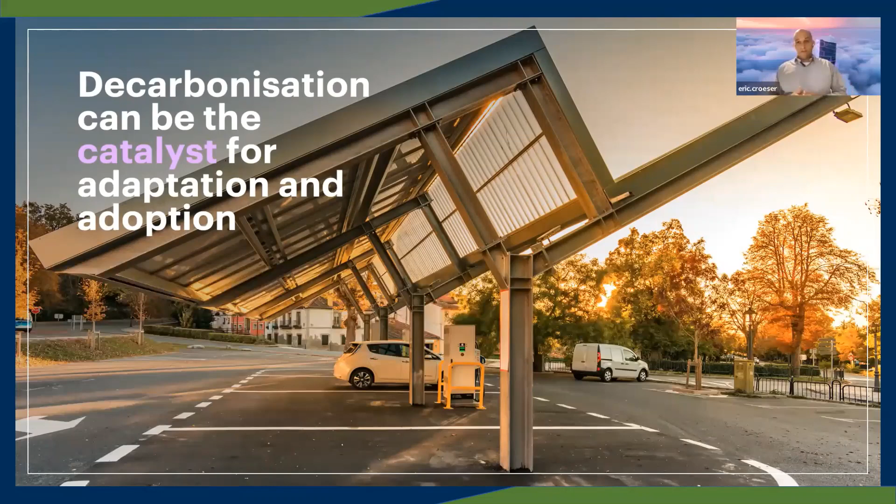So when we start referring to an integrated value chain, what we are actually referring to is seeing the picture for what it is. We have been very, very good, as I mentioned earlier, to see components of that and really optimizing components of that picture. But the same as any painting that you see - it's really if you start moving away from it and start understanding how the holistic nature of that picture looks, you actually understand where you're going to.

So when we talk integration of value chain and integration of data across the stack, it's really around seeing the holistic picture for what it is, understanding what our roles are that we play within that, and by stitching all of those little missing puzzle pieces together, we will and can see the main picture.

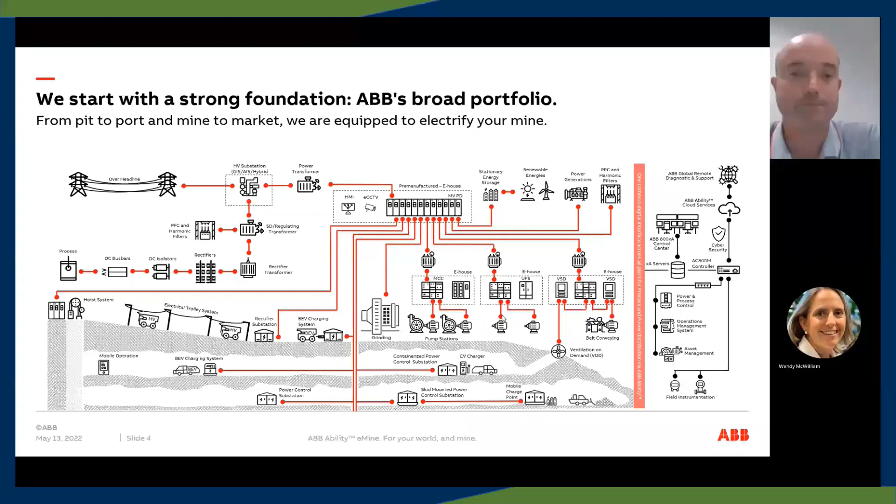If we actually break it down into an underground mine and be a bit more specific, you can see hoist on the far left and ventilation. These are some of the major users of electricity in a mine. And if we, as an example, are going to electric underground fleet away from diesel, what would be the impact on ventilation as a great example, right? That would probably reduce as an example. So that can be a major source of electricity usage.

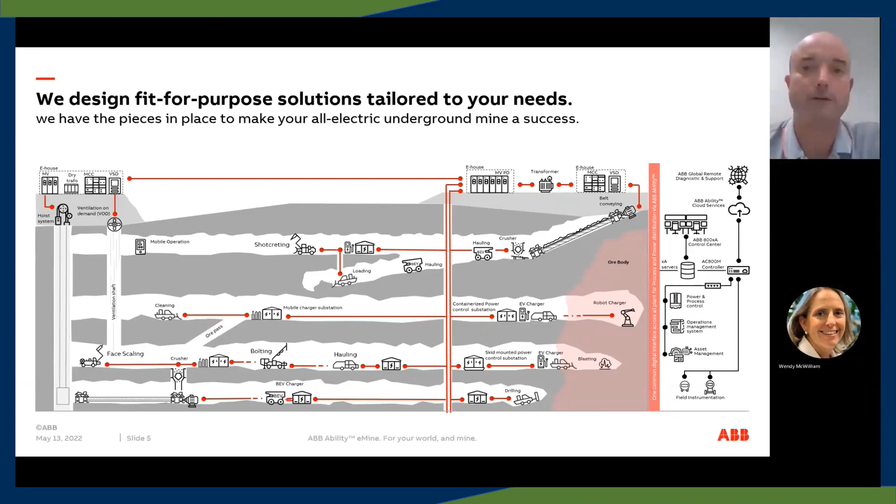We've got the underground chargers, for example, here you might have conveyors, etc. So how do we actually then couple this with making sure that we're not bringing 10 vehicles at one time to charge and making sure that they are spaced apart? Because 10 vehicles on an electrical network is going to be a lot different than one vehicle every 10 minutes coming to the electrical vehicle network.

If we look at it from an open pit mine, the key part here is really the trolley and the trucks. So the trucks generally on an open pit are generally larger, so we're talking much more draw on the power system. So we would look here at having a trolley, like I said, directly coupled to the wheel motors, and that would then provide a faster solution for it. There are the charging systems there. Do they have batteries in them and trolley charging battery?

Is it pure trolley then with diesel? There's a lot of different designs that are possible. Couple as well, again, with conveyor systems, shovels, drag lines. There could be skid mount power controls in the pit, as an example. There's a range of different electrical things that we can do.

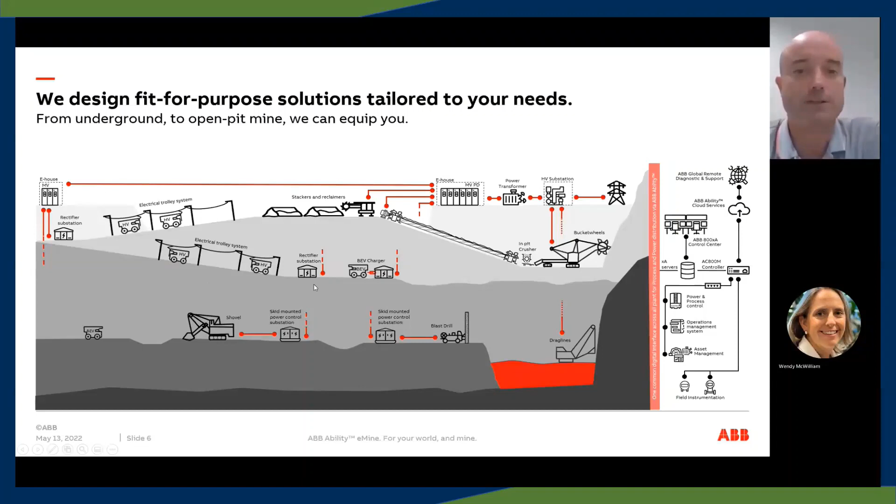Again, the same thing - how do you actually control all this and ensure that it's all not coming onto the system all at once? So 4 trucks coming on at 4 megawatts all at once onto a system can be quite a big load. When we look at the trolley system itself in a little bit more detail, the first thing is it reduces CO2. Yes, it's electric.

It's driven by the trolley lines above, and this is an example from Boliden. It's higher speed, and this is really one of the key advantages - going up those ramps, it's a lot faster, which means that in theory you can reduce the amount of trucks if it works out that way, and also maintenance cost.

It has a return on investment around 2 to 5 years, and it just depends on the makeup of what you're actually trucking, size and things like that. So it's a great system. We're starting to see more and more of these. This is in Boliden as an example.

One of the other key things that's possible is a 600 kilowatt fast charger. We use this for a lot of the underground applications and have some pilots in Canada currently. What you see here is the actual connector into the truck - it would raise and then engage with the truck and provide power to it. So it's a great solution we have for fast charging, generally used in underground type solutions.

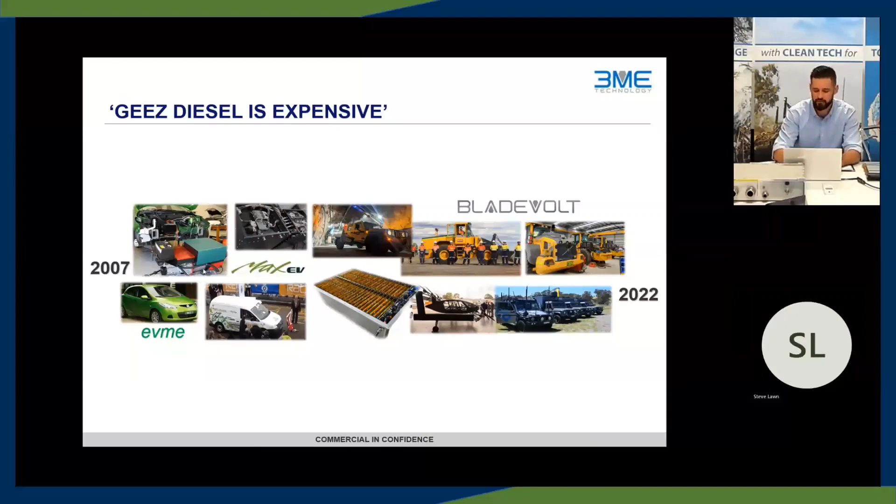So for a little bit of context, I'll flip now to the company video, which will provide some more information as to where we're at today.

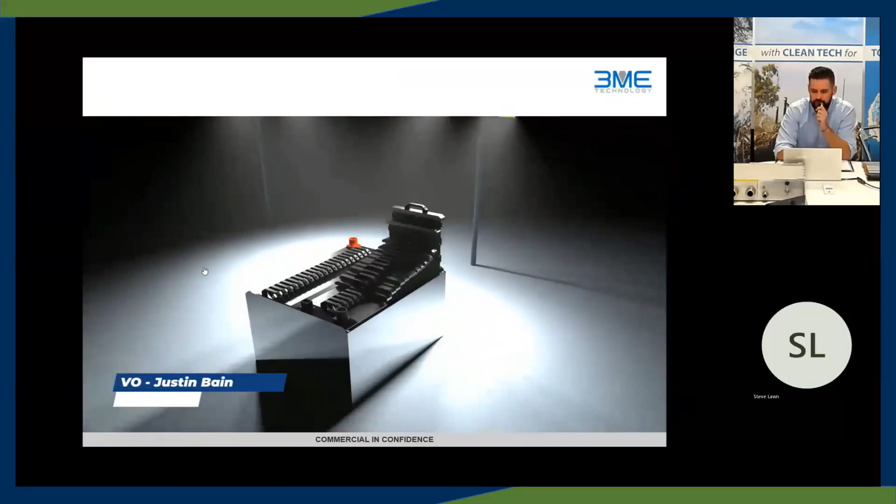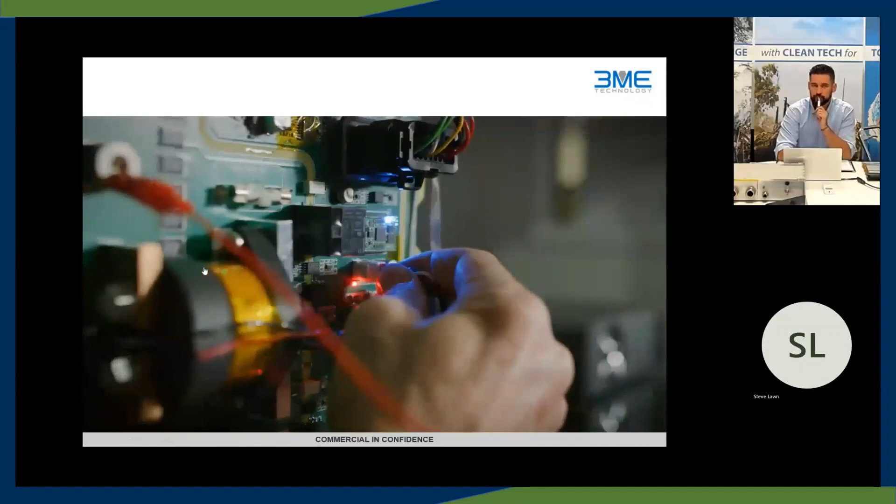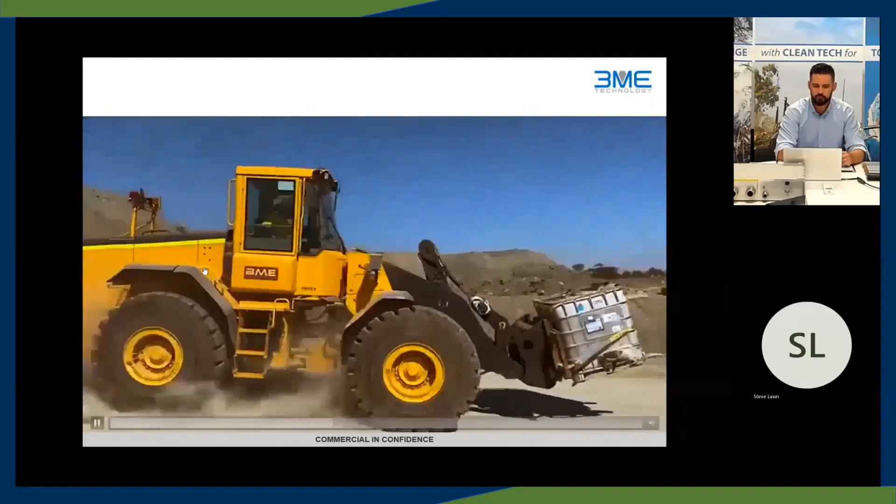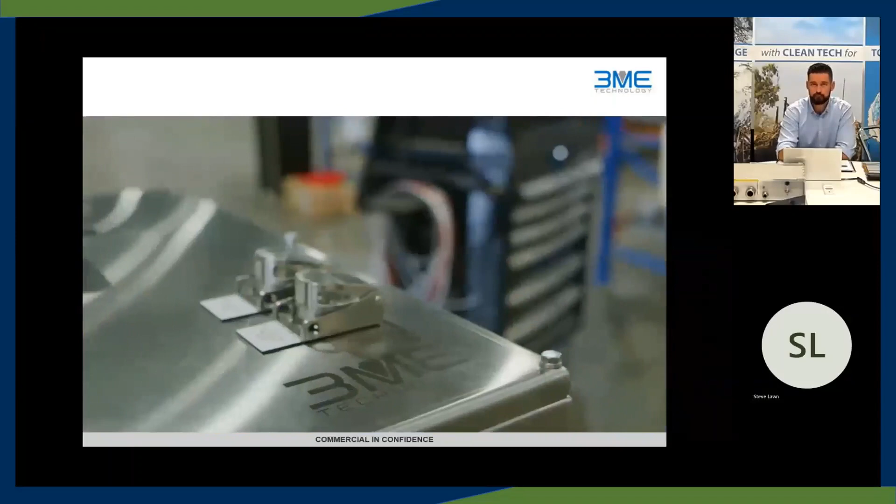3ME Technology is spearheading state-of-the-art battery systems into mining, military and marine applications to enhance performance, safety and sustainability. We are a fast-growing scale-up with three spheres of technology: power solutions, mobility and digitisation. We are an electric vehicle systems and battery technology company. We are helping large vehicle manufacturers electrify their offering through scalable products and services that include batteries, software, electric vehicle kits, and systems integration. We provide high reliability, clean tech for tough industries. Our team at 3ME Technology has deep technical and operational experience across the industries we serve. I'm proud of our amazing team for getting us to where we are now, but I feel like we're just getting started. At 3ME Technology, we are powering change in support of a cleaner future. So come join us and be part of the electric vehicle revolution.

Okay, the first problem that the team faced when they directed their attention towards the electrification of mining kit was, it's hard to take a battery from a passenger or on-road vehicle application and have that effectively perform in an underground mining environment. We all know how hard these pieces of kit get treated and the environments within which they operate. We also know that beyond anything else, they need to be safe.

So that's what's precipitated the last 5 years worth of R&D in the battery technology space, which has delivered the BladeVolt battery system. The BladeVolt battery system is a safe, modular, scalable, remotely monitored, highly maintainable system that allows us to predict, intervene and prevent battery faults that will lead to fires, but also identify issues from a maintainability perspective and remove the need to swap out a whole pack, rather allowing us to swap out a blade, which is a much more cost-effective effort.

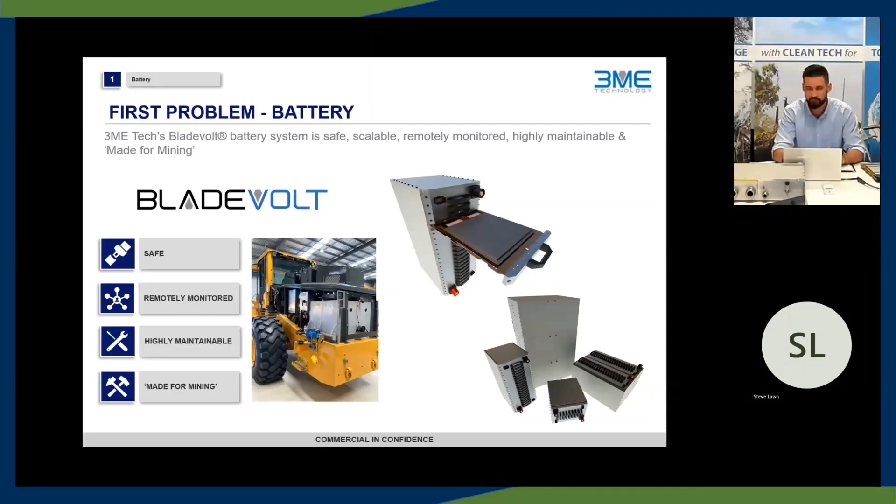So to solve that problem, we've sought to make a battery, successfully made a battery that's been designed from the ground up for mining. The second problem is, how do we get that battery into a system that works in an underground mine?

The first piece is duty cycle analysis. This is the cornerstone of any system design that we complete. It's constantly improving with data coming back from the field. However, it's what effectively needs to be done to decide battery size, which then feeds into power distribution and safety systems. So introducing 700 volts DC into a platform, into an underground mine, requires some safety measures, and that's a big thing that we focus on here at 3ME Tech.

The third is vehicle control unit software. So how do we conduct the systems integration in a manner that allows for minimal change management, i.e. an operator can jump straight in the platform, use its existing controls, and have the platform perform like its diesel counterpart.

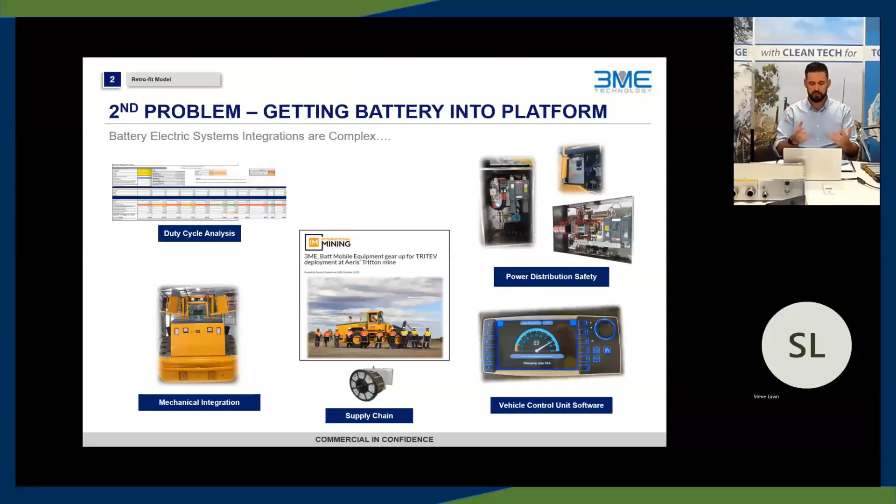You can see down the bottom there the motor, so supply chain, that's probably everyone's favourite problem at the moment. Don't need to speak too much about that, but it is a key part of the systems integration effort. And then finally, it's the mechanical integration of that battery electric engine package into a platform. We work with some really incredible OEMs that utilise their wealth of mechanical knowledge to fit a system that is battery electric into a platform that was designed to be a diesel.

That's a 1,000-volt AC inlet to 350 or 700-volt DC outlet, depending on your battery size. So that lives on the vehicle, which means that in stacks of up to 100 kilowatts, we can plug directly in from the 1,000-volt AC jumbo box, which will go through our power, through the charger, through the power distribution system into the battery and charge the battery. This allows for opportunistic charging, which we feel is the key to meeting some of these duty cycles.

Fourth problem, what do you do when the battery is at end of life in the vehicle? This battery, or the Bladevolt architecture, lends itself to quickly identifying which blades or which cells are suitable for redeployment into second life storage systems, energy storage systems, or peak load shaving type arrangements. So we expect between 5 to 8 years of useful life in the battery in the vehicle, and perhaps up to 15 years worth of useful life post vehicle in the low charge discharge environment that is static energy storage.

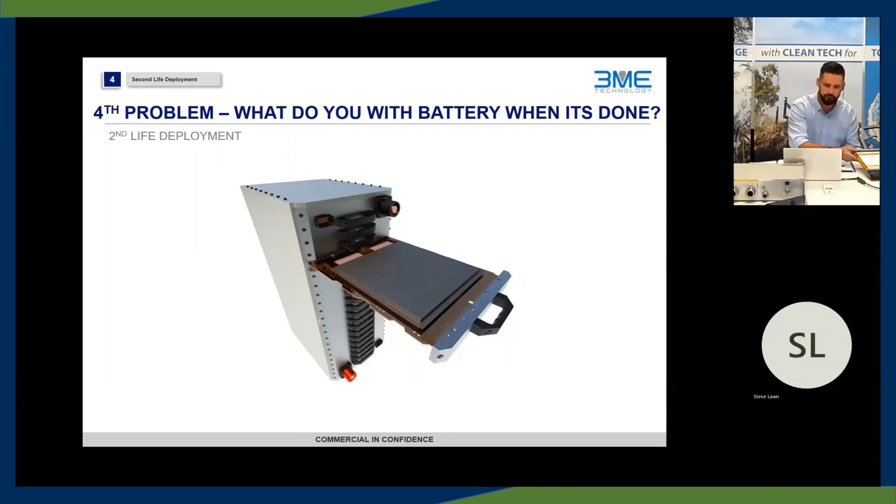Finally, the fifth problem, how do we learn and improve? The more data that comes in, the more we get to learn about our battery, how that performs and improve it. The more we get to learn about how the system or the battery performs in the system, how the system performs in the vehicle, and how that vehicle is utilised in the duty cycle in the mine.

So that's the 5 key problems that we're faced, and look forward to discussing these with you over the next little bit in the Q&A. Many thanks again for the opportunity to present.

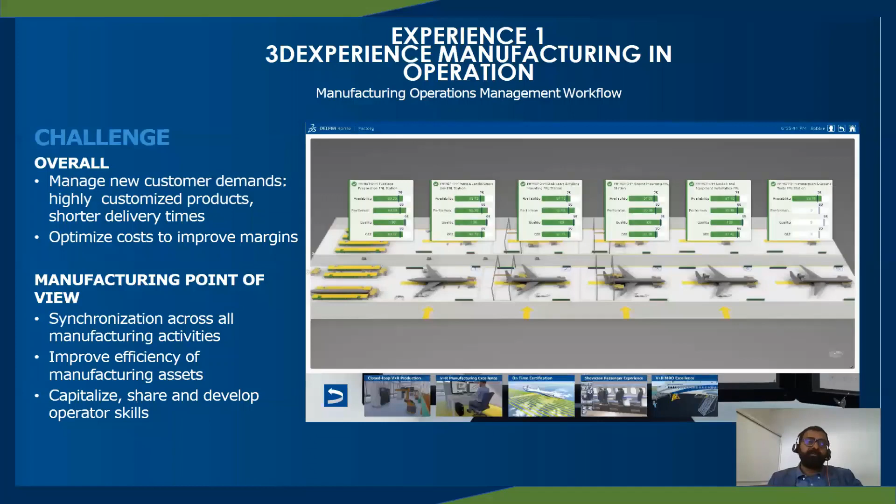Now I'd like to show 5 experiences which could be easily replicated from manufacturing industries to smart mining, and I'll be showing some real-life examples.

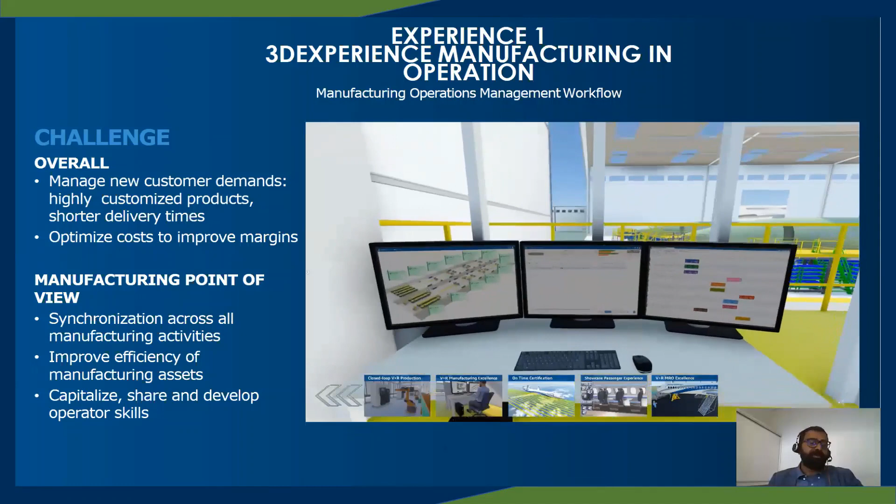What you're seeing here is a manufacturing operation management practice from aerospace and defense, which is largely being used for achieving greater productivity and sustainability. This is a manufacturing operation management solution providing digital technologies for processes, performance management, and visibility across all operations, magnifying the impact of operational improvements across the whole enterprise.

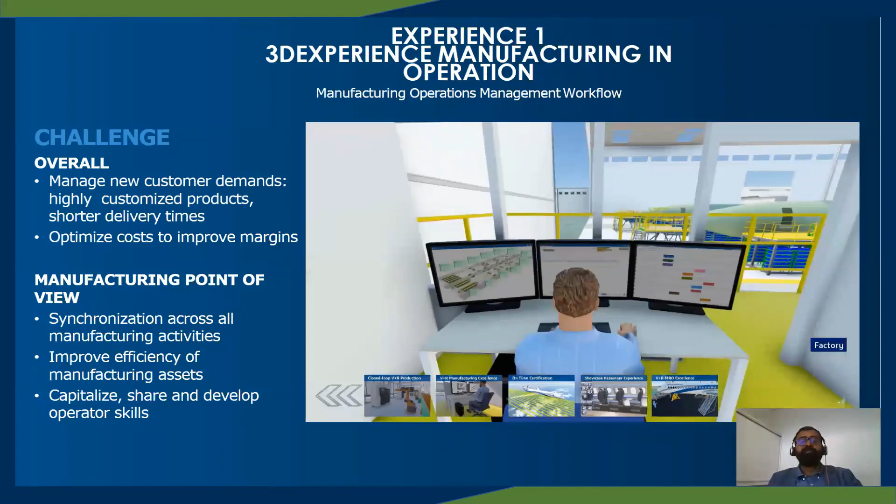This is a unified application which has business processes like production dispatch board or production management, quality management, warehouse management, production intelligence pack, and even integration for IoT sensors to achieve greater manufacturing flexibility.

As I said, we can leverage best practices from the aerospace and defense industries to bring value to mining companies as a unified application with a simple web and mobile-enabled interface, leveraging a single data repository.

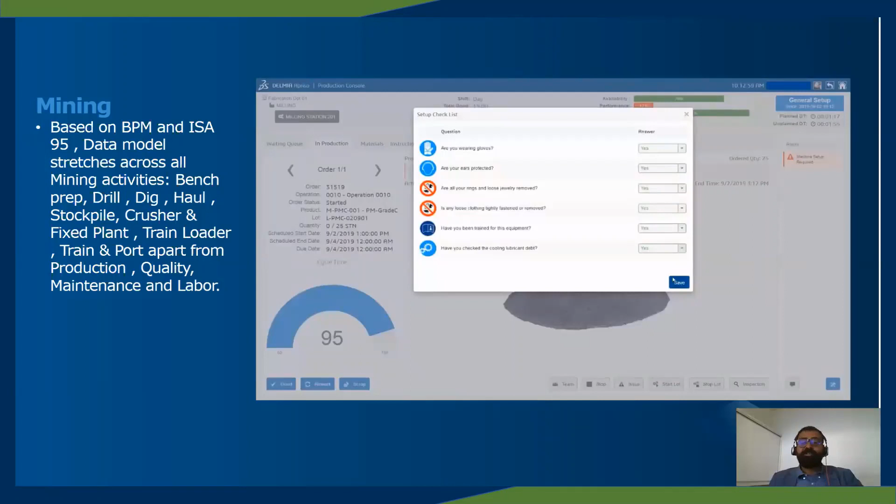This addresses all the requirements of mining companies for their digital transformation journey. The solution includes various business processes like production tracking, material balancing, stockpile management, and production execution management and decision support within the value chain. This is all based on ISA 95 architecture, which is an international standard for automation to achieve Mining 4.0 as a business process.

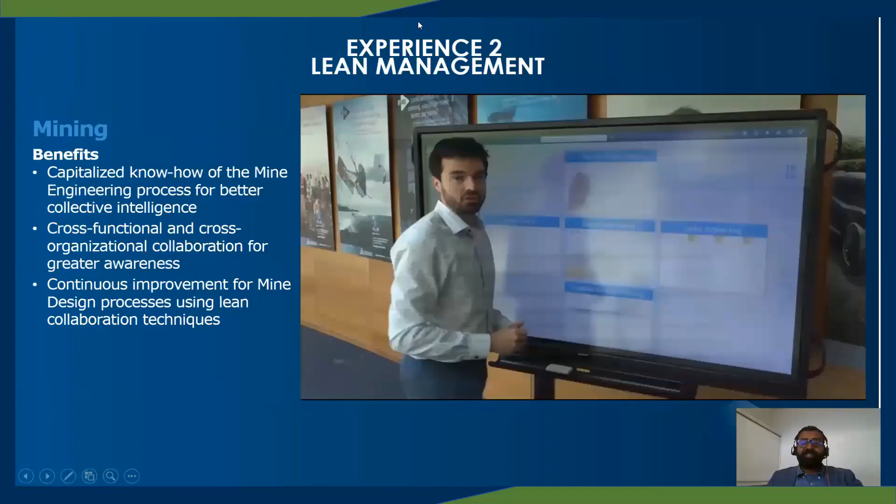Looking at our second experience, which is lean work management. A general tendency in mining is ad hoc working methods, which are not aligned with lean philosophy. In this case, we can establish a day in the life of a mine planner, mine manager, and even workers within this lean management application.

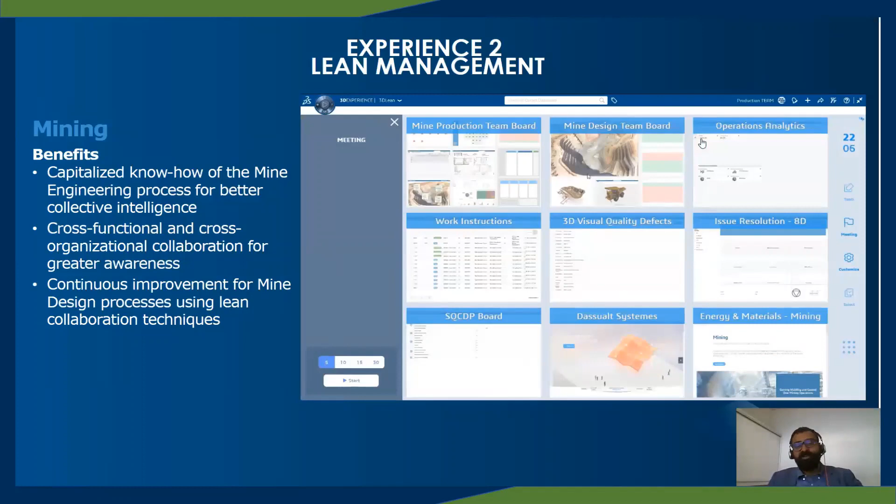As you see here, this is a modern interactive environment that closely emulates the simplest of meeting tools: a whiteboard, a marker, and a sticky note. The objective here is to replicate natural interactions and allow anyone to engage productively.

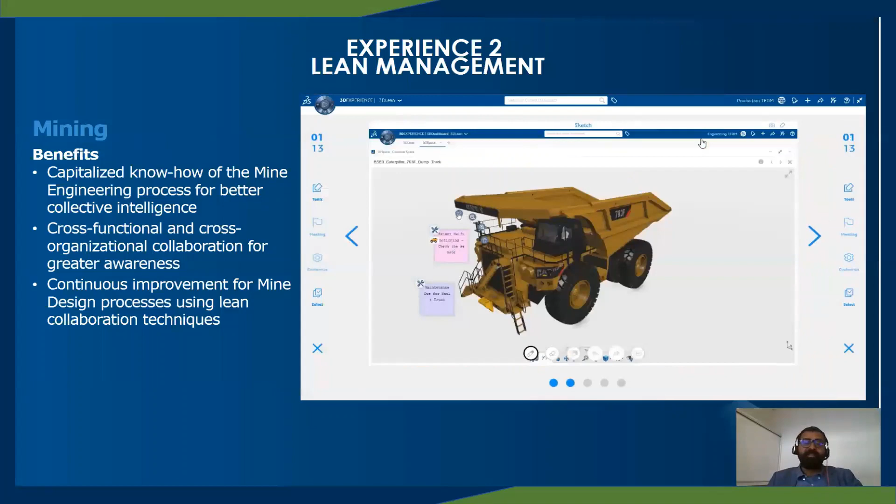You can also see how easy it is to include digital content like geology data and even operational data, bringing manual meetings onto the platform, making the best use of digital technology here.

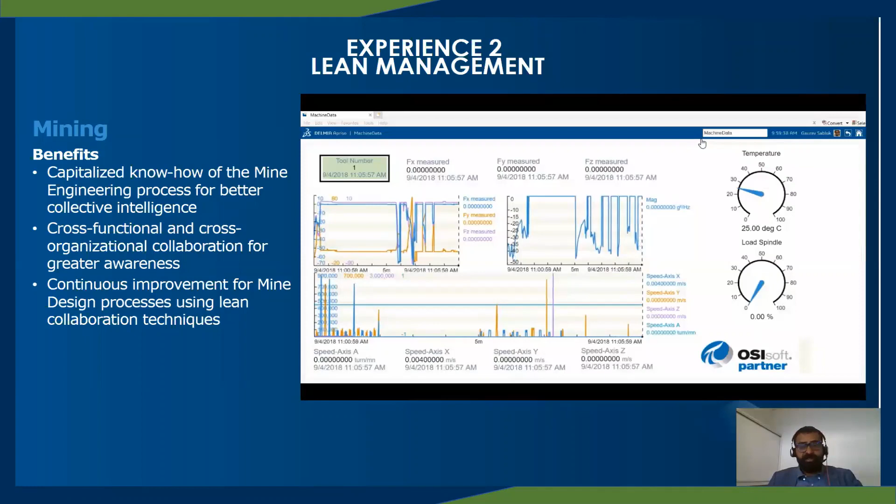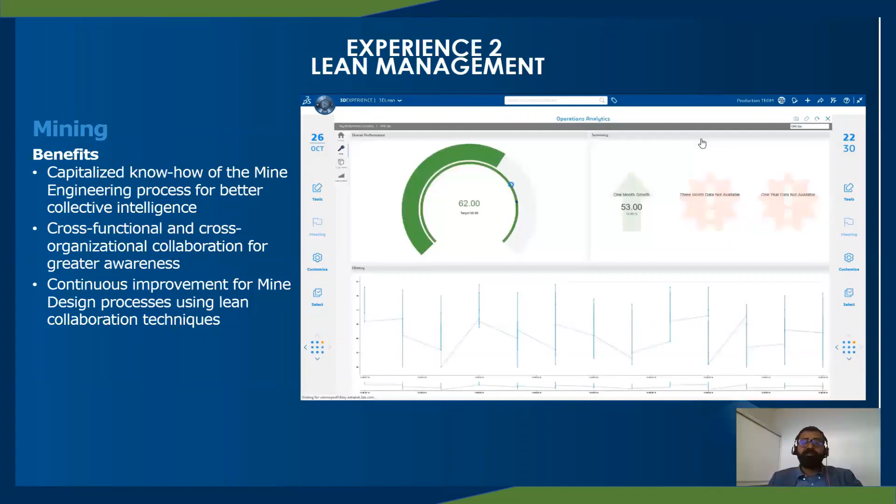Cross-functional teams can work together efficiently in lean mode to solve strategic issues like safety, production delays, and catch-up plans. In fact, lean principles can be applied to all mining processes to achieve sustainability, allowing the team to engage more efficiently. This is one of the lean tools we've been working with multiple mining companies to achieve resource optimization.

Looking at experience 3, how robotics and automation can be leveraged into mining practices. Robotics and automation has been in manufacturing for a few decades now, with continuous improvements happening in robotics applications in manufacturing. Replicating the same, especially for underground mining, can improve safety and operational efficiency through simulation and execution management, including development of programs, virtual programs, and validating PLCs, which is a greater value for mining applications replicating best practices here.

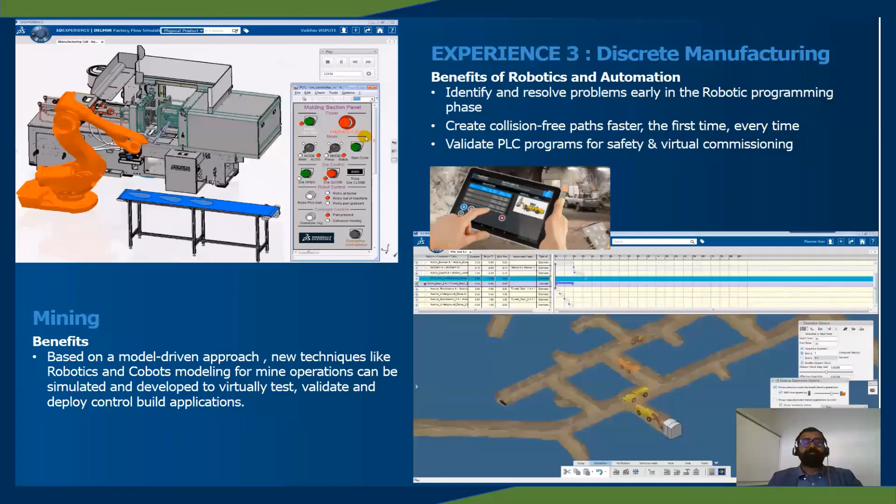With regards to manufacturing practices, that is manufacturing simulation to achieve some of the mining simulation practices here: discrete event simulation has been used in manufacturing for throughput analysis and resource optimization as well, by identifying bottleneck areas and congestion areas in the production plant, and to optimize resource utilization and material flow.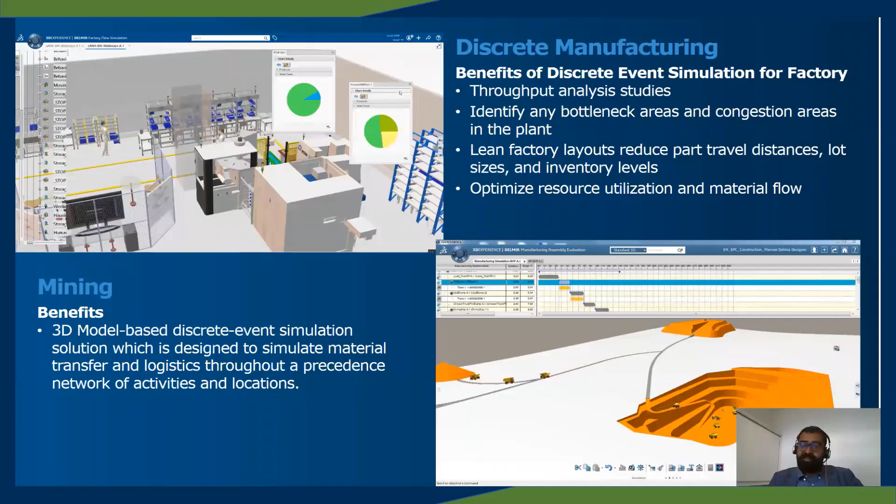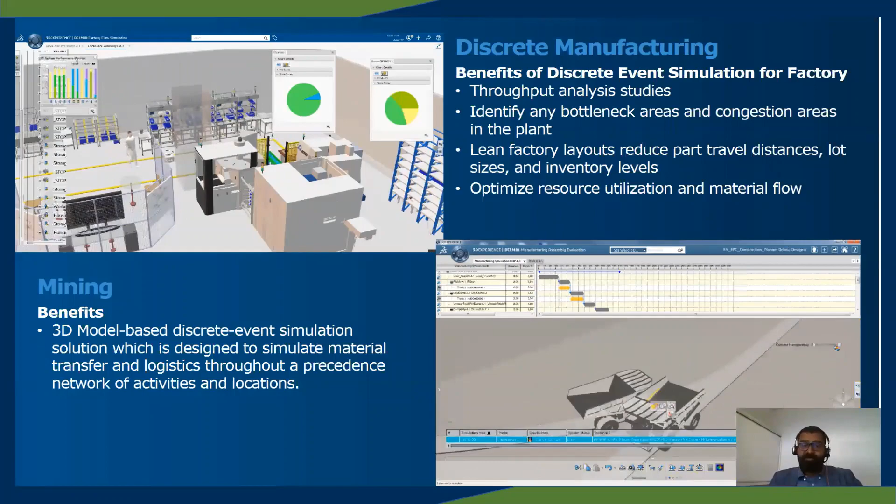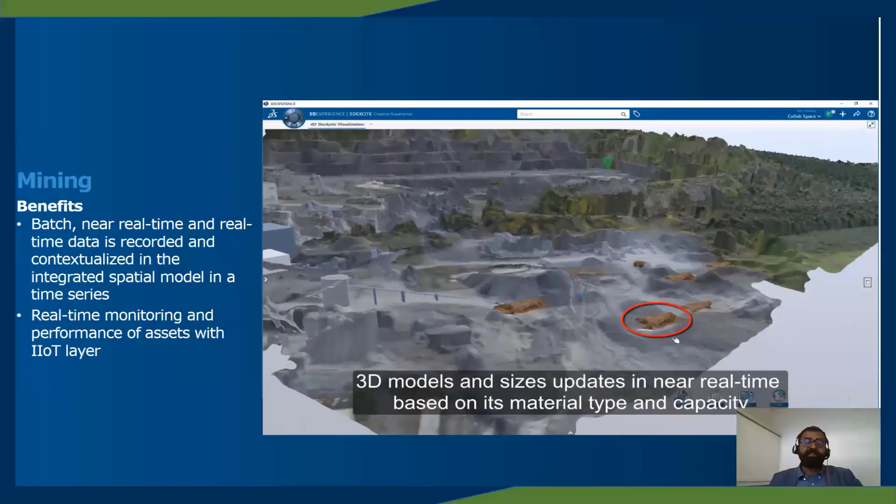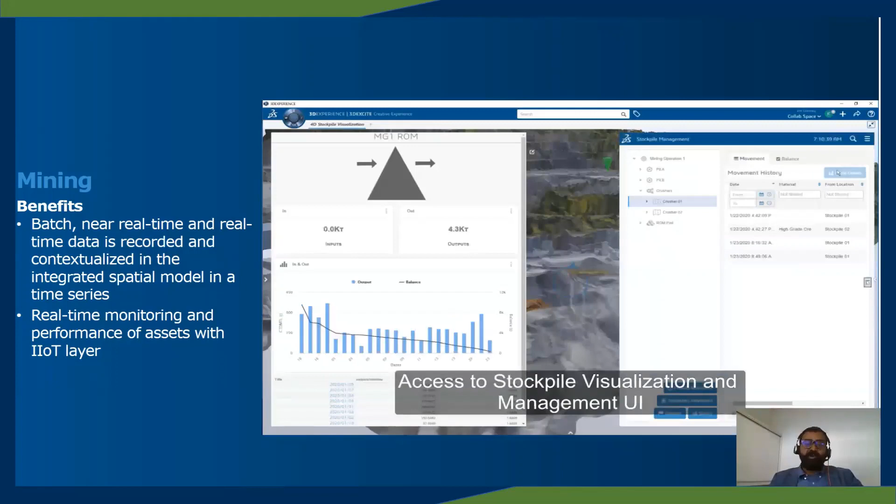In modern mining operations, maximizing productivity through effective decision-making is crucial. Discrete event simulation is used to conduct what-if analysis, supporting mining engineers and management in decision-making support. The concept of virtual twins creates unified data, bringing together geology data, mine planning and scheduling, ERP information, and fleet management into a business process management based application architecture, which supports frequent changes to business processes—a key requirement for improving responsiveness to market and supply chain conditions.

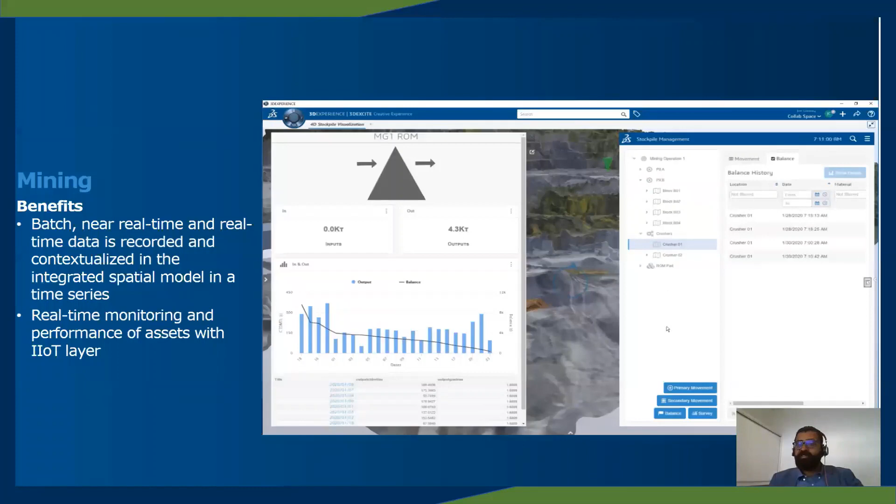There is good contextualization of data coming from 3D geological data, and it gets contextualized with data coming from various sources like sensors and machines. This contextualized and historized data enables predictive management of various processes.

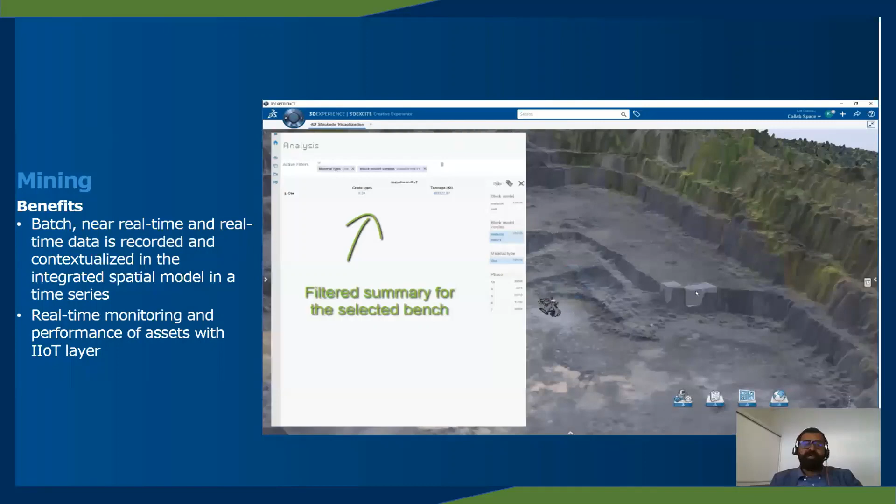Coming to experience number 5, value network optimization with scheduling, manpower, and supply chain optimization to achieve sustainability. Meeting the mine industry's demand for a complete mine-to-port solution provides visibility and integration from production planning and operational performance, manpower requirements at the mine, all the way through to stockpile and port management, and movement of logistics materials via port, rail, and shipping, aligned with logistics colleagues' decisions—one integrated end-to-end solution for mine-to-port management with scheduling optimization.

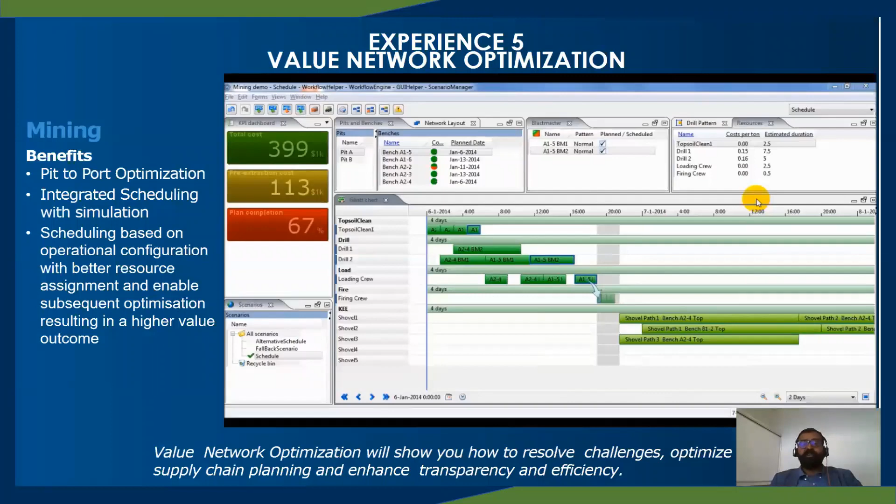To conclude, you have seen how smart manufacturing practices can be leveraged for smart mining to achieve sustainable innovation, value network optimization, and importantly, to create the workforce of the future with latest technologies like virtual reality and augmented reality to make the workplace future-proof.